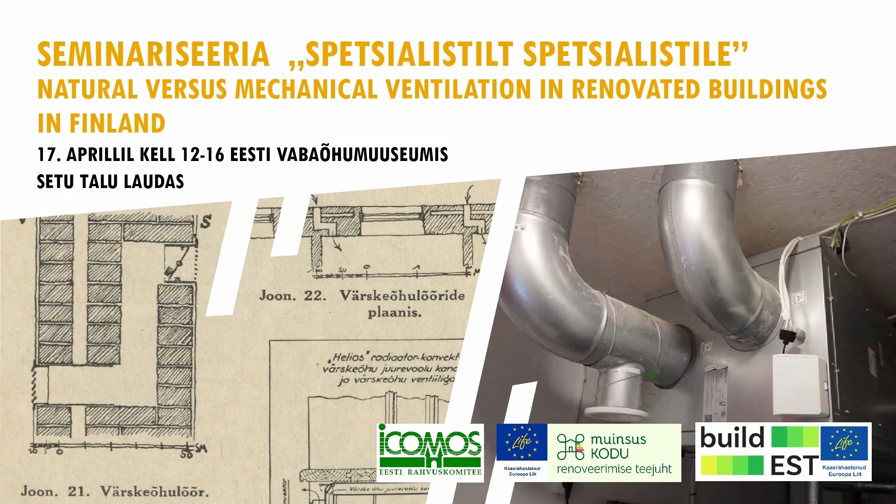As one of the authors of the Ilmakirja, I'm now going to present quite shortly the contents of the book. This book was published in Helsinki 2 years ago, and it was very soon sold out. And another edition came out maybe 1 month ago this year, so it's again available.

And this proves that there is a growing interest in natural stack effect ventilation in Finland among just common people as an alternative to mechanical ventilation. So why did we write this book? It's the first extensive book on natural stack effect ventilation in Finland, although this system, just like Alois mentioned, was the prevalent system in building in Finland until the 1950s, and even after that in individual buildings and terraced houses or row houses.

For example, I have lived almost all my life in a house that has natural stack effect ventilation. I'm still living in a house that was built in 1935. So, engineers are no longer being taught in Finland how to maintain or repair or plan and design natural ventilation. This means that we have a very high level of know-how in how to design mechanical ventilation. But there was an ardent need for a book that would show how to maintain, repair, and design

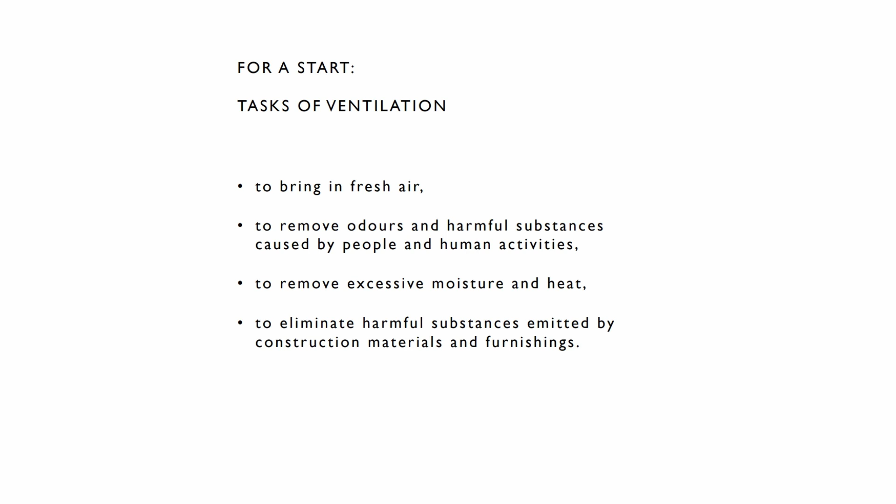natural ventilation. Some basic issues about ventilation. What are the tasks? The same applies to natural ventilation and mechanical ventilation. I don't need to go further into this, but to what we deal with in this book. We have different chapters dedicated to different topics, and first of all, how does natural ventilation operate if it's designed as it should? Juulia will go deeper into this in her presentation. But what I want to point out is that it's a passive system that doesn't need any external energy, but works by the laws of nature.

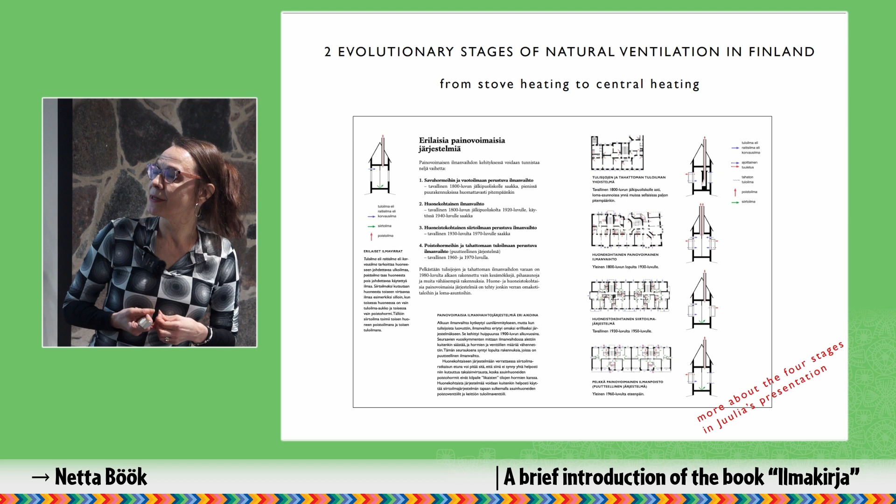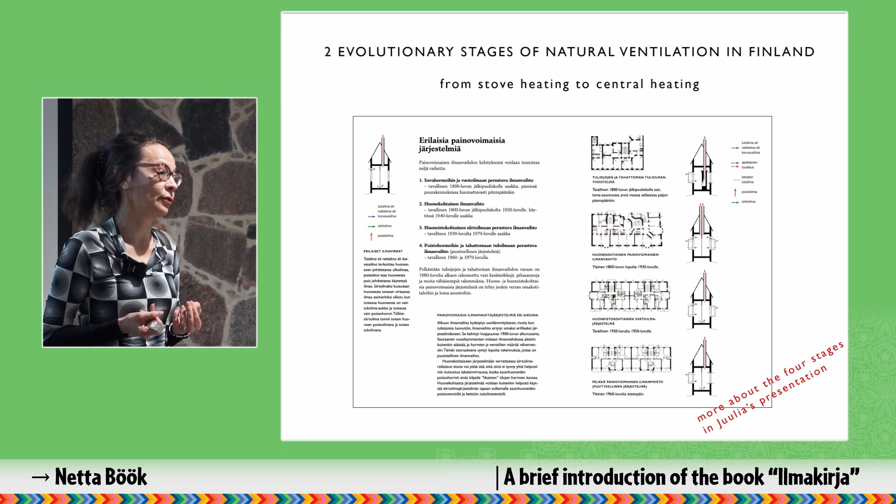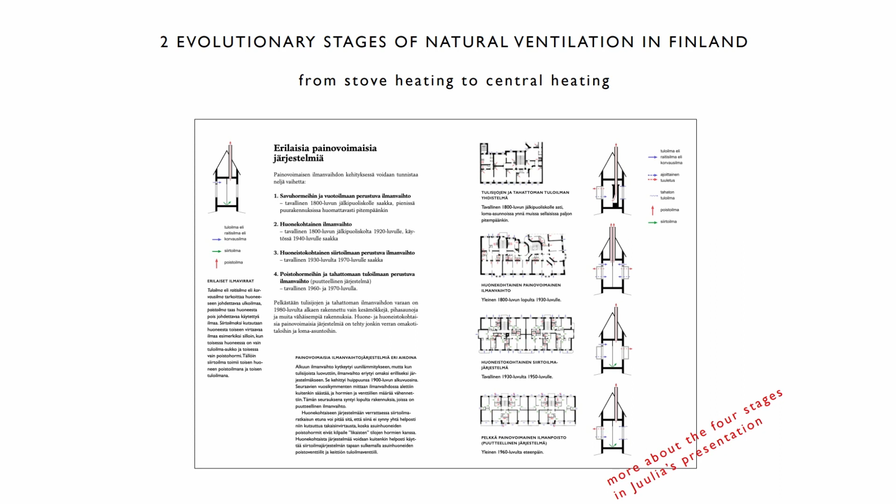To better understand how to maintain natural ventilation and how to improve it in existing buildings, we studied the history and evolution of natural ventilation in Finland, and we could recognize 4 different stages, starting from the 19th century till the mid 20th century. Then there was a big gap in Finland, and very few buildings with natural ventilation were built. Then we had to have a look at the earlier regulations. What were the requirements for ventilation earlier in Finnish buildings? Because they have directed the planning of the floor plans, the houses, and of course the ventilation.

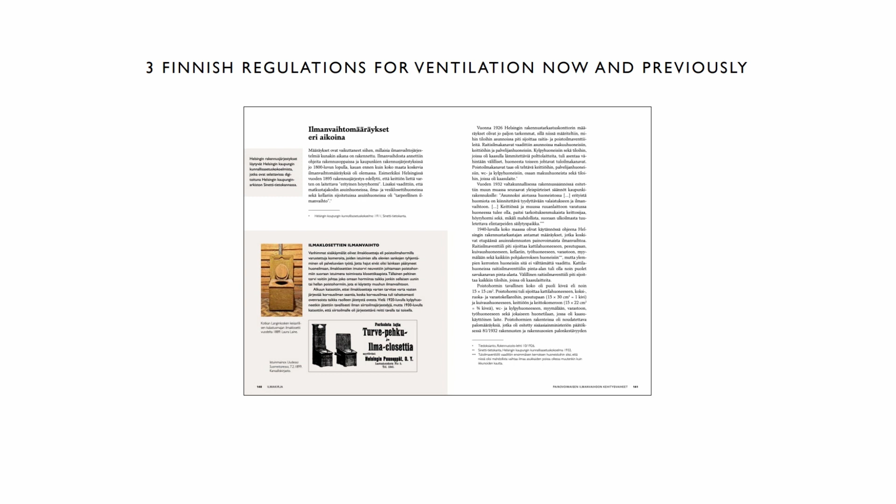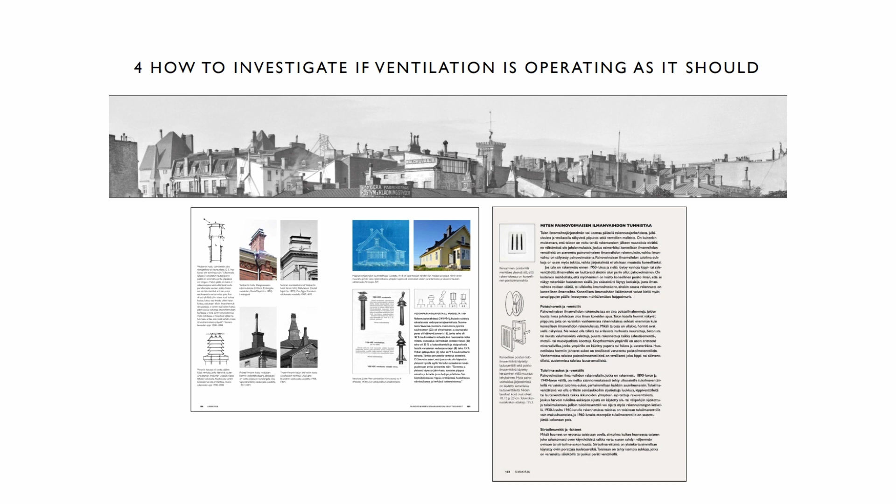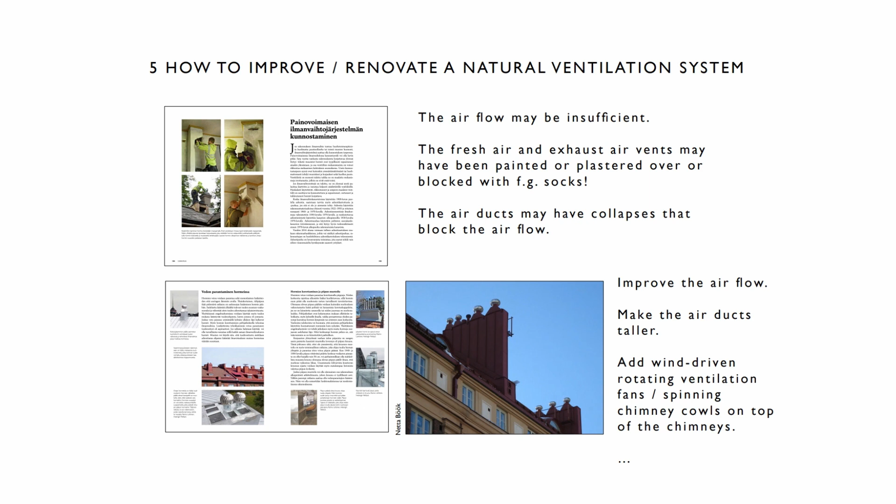What is important when we start to look at a certain building that has natural ventilation, or problems that should be solved, is to investigate the system in this building. We give some advice how to do it and what must be taken into consideration. And then, if you want to improve a system that is not operating properly, what can you do? Is it some smaller measures, or do you need more extensive measures?

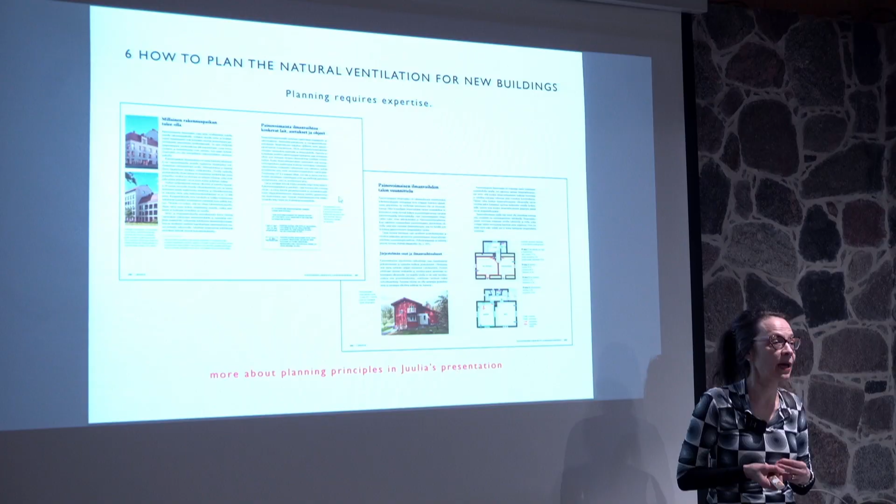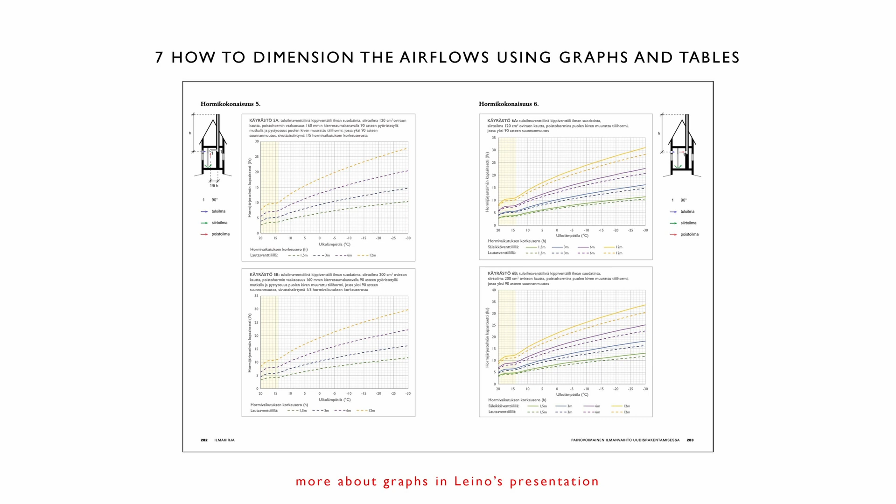And then the question of modern architecture. If you wish to design, for example, an individual house or a block of flats, how do you do it? You must start from the floor plan with regard to the ideal placing of the flues or air ducts. So you cannot just impose a natural ventilation system on any house. And then this is Leino's specialty, the graphs, how to dimension the airflows when designing or improving a natural ventilation system.

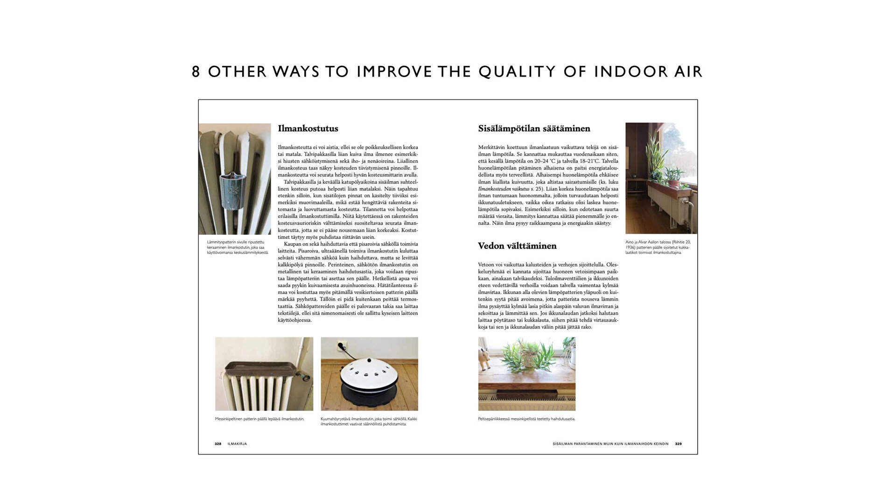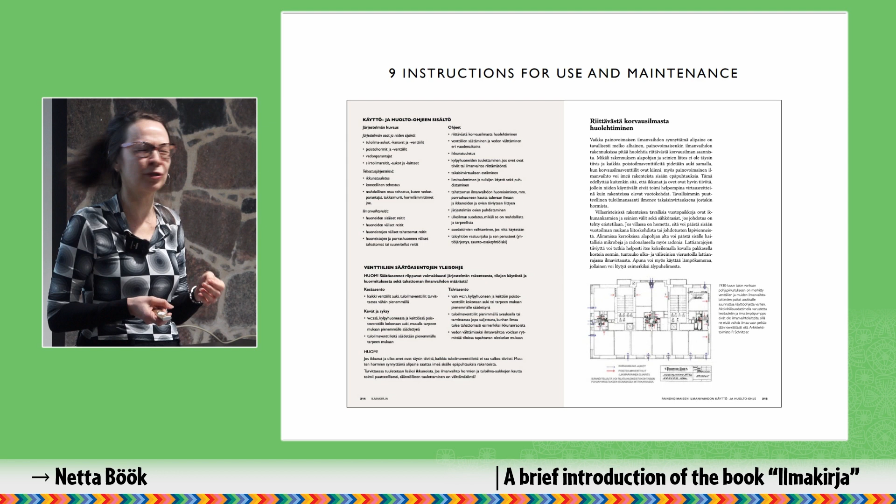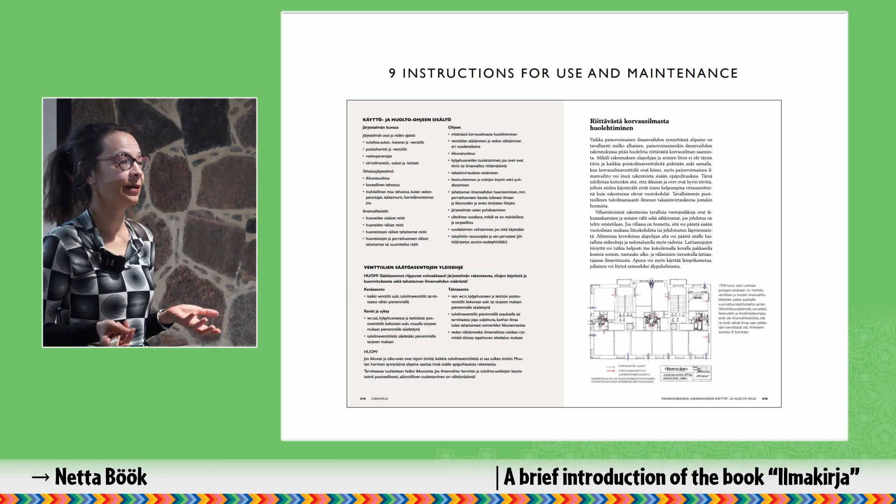And there are other ways to improve indoor air quality, like plants inside. This is also an acute question. We should have more plants and trees outside that give shade to buildings. As funny as it may sound, we all need some information about how to use natural ventilation. This is an issue I face in my house, because people don't understand the system, and we often hear the criticism that natural ventilation just doesn't work, it's bad from the start. But you must know its limitations and its advantages, and then you can adjust it and learn to live in that house. As I have always lived in a house with natural ventilation, I think it's the best. But that's my opinion.

Today it's quite important to take into consideration energy efficiency. This is where Leino will give you some answers and maybe some questions for discussion. It's a proven fact in Finland that old solid brick buildings consume far less energy than theoretical calculations imply. Furthermore, these buildings, for example in the Töölö region of Helsinki, have been constructed in a way that is sustainable and long-lived, and so is the natural ventilation system. It's generally not worth adding short-lived technology to these houses.

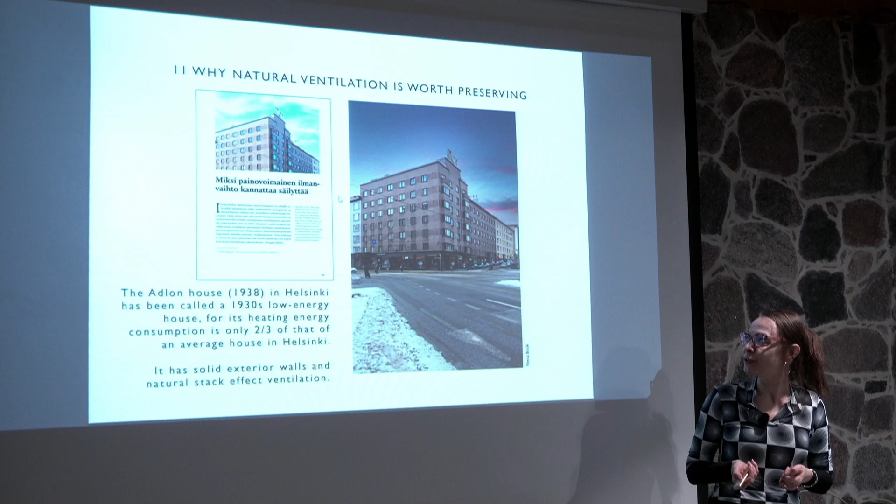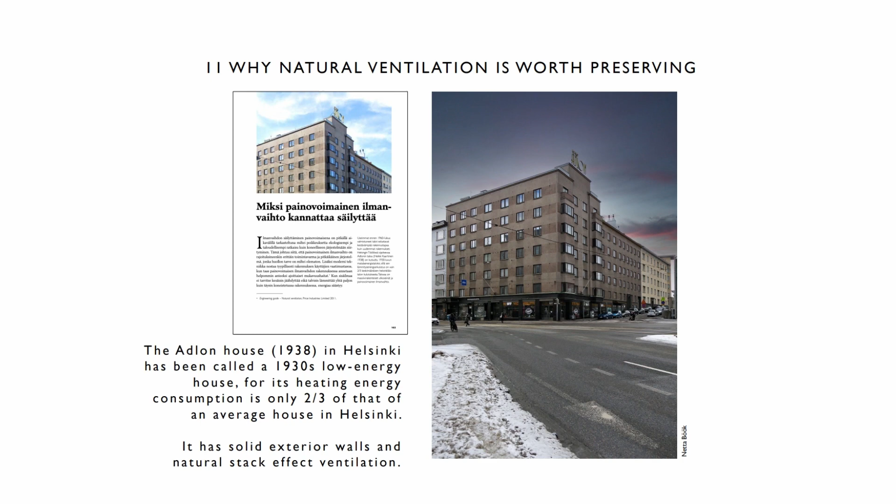To end my speech, I'm showing a picture also from Töölö. A couple of years back there was an article about this Adlon house built in 1938, which was called the low energy house of the 30s, because its energy consumption was much lower than average houses in Helsinki. So the old buildings have potential. Thank you.